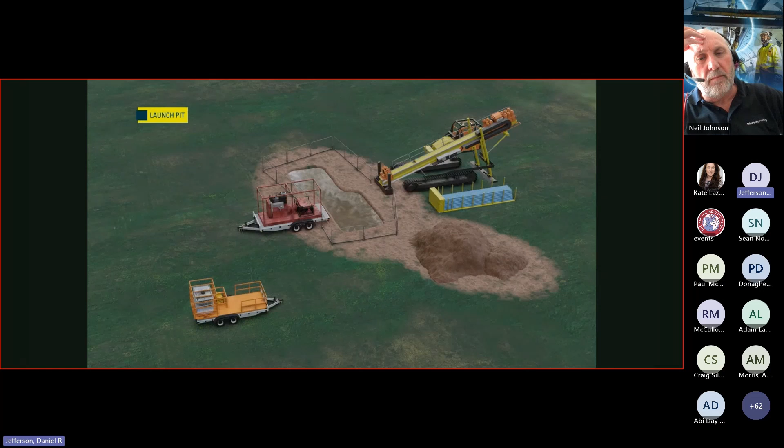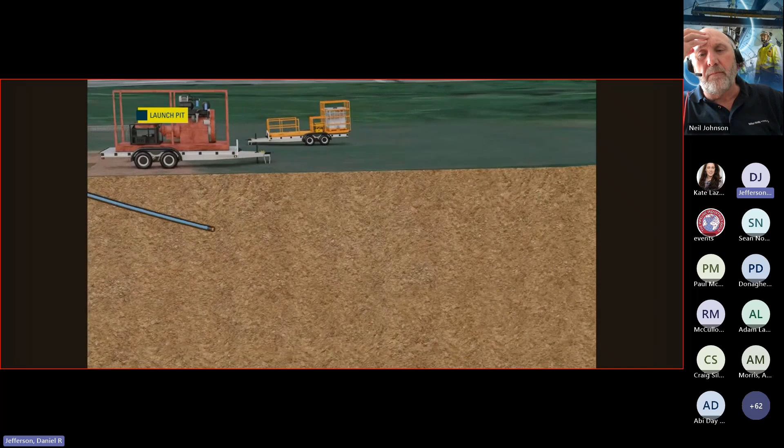Today's activity was to install 100 metres of 180mm SDR11 ducting to allow the diversion of a high voltage cable. The tunnel to accept the duct had been completed the previous day. During the last stages of dispensing the pipe, it sprang out of the bottom rear quadrant and struck the driller, resulting in blunt force injury.

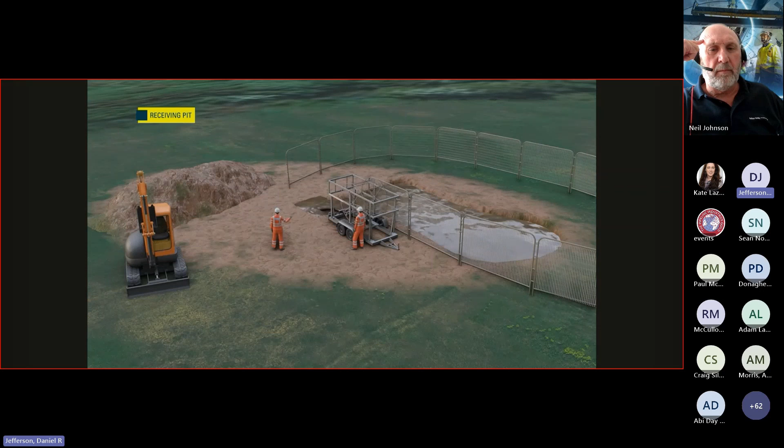This animation is issued along with a safety update on safe operations and actions to be taken when working with coil trailers. There is also important safety information regarding the safe systems of work which need to be observed when using this type of equipment.

Thank you, Dan. If we can get that off the screen - not sure whether there's any more slides in there. Okay, right. So I think that should hopefully give quite a lot of context to what actually happened.

And as I said at the head of the call, I'd worked in and around the gas industry for close on 40 years of my career, and I'd never seen that sort of situation happen on the hundreds of sites I've been on where coil trailers were in use. And clearly, when such a tragic accident happens, the thing that any investigation and any organisation tries to do afterwards is to prevent it happening again.

Now, this job was being done by Harper Services on behalf of Morrison Water Services, who Balfour Beatty Vinci, who I was part of, had subcontracted to do this work. But we felt that what we needed to do as Balfour Beatty and HS2 was to use our convening power to work directly with coil trailer manufacturers and the wider industry to try to prevent such a tragic accident happening again.

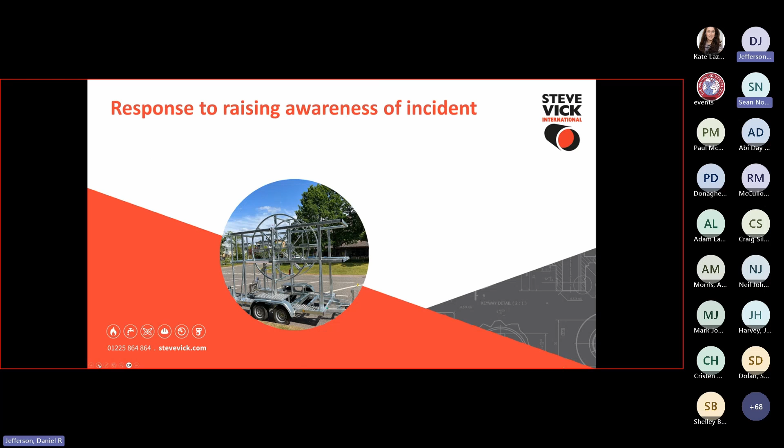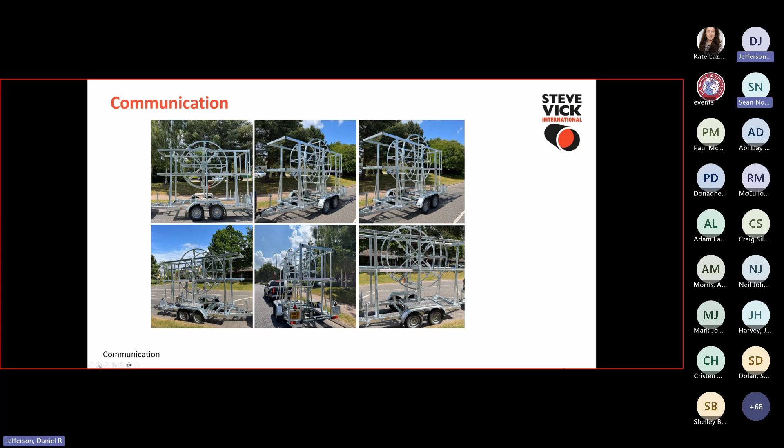So in light of the incident, what we've been doing ourselves as an organisation is working our way through our database of 180 trailer customers from the last 20 or so years, reminding them of the existing safety features of the trailers and the importance of following the operational instructions in the manual, but also making them aware of additional equipment being developed and trialled that will become available in the coming months. We're also creating a bulletin we intend to communicate in the next couple of weeks with the information you'll be seeing today.

Although there are established safety features and protocols to manage the risk, what we should not do as a supplier or as a sector is say there's no need for change. We should always look for improvements, just as Neil said earlier on. So working with industry folk like yourselves and other trailer manufacturers, we've agreed to develop additional safety elements for the trailer and its guidance for use.

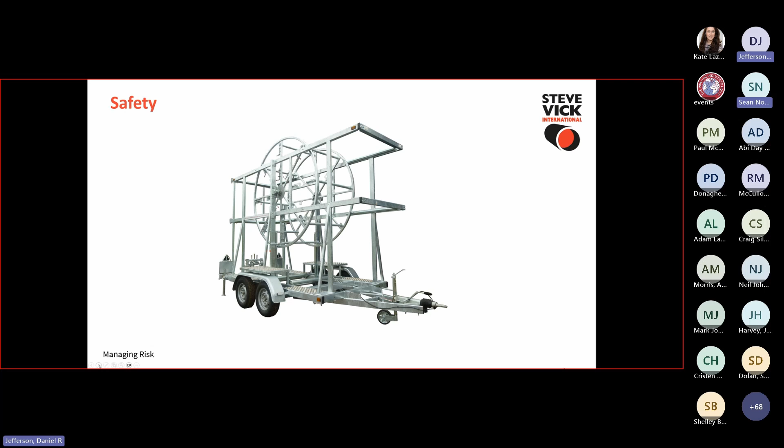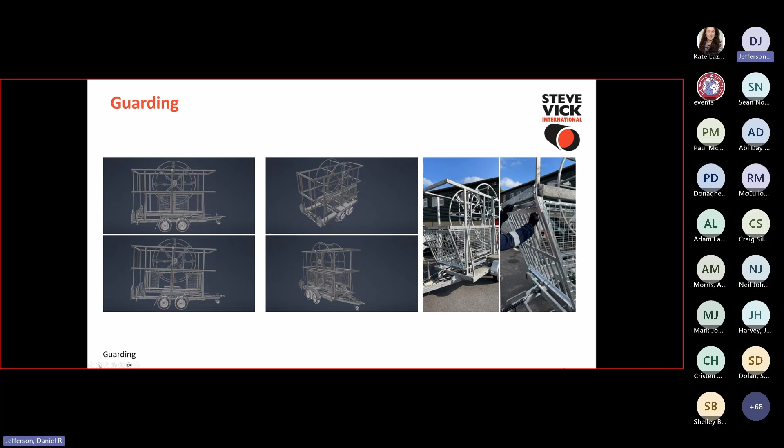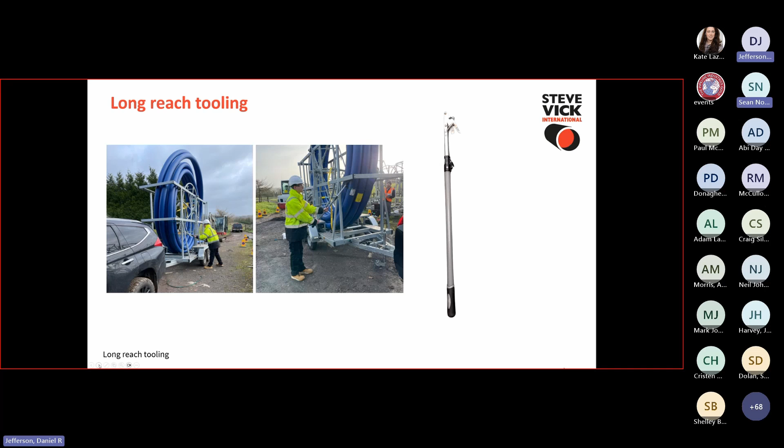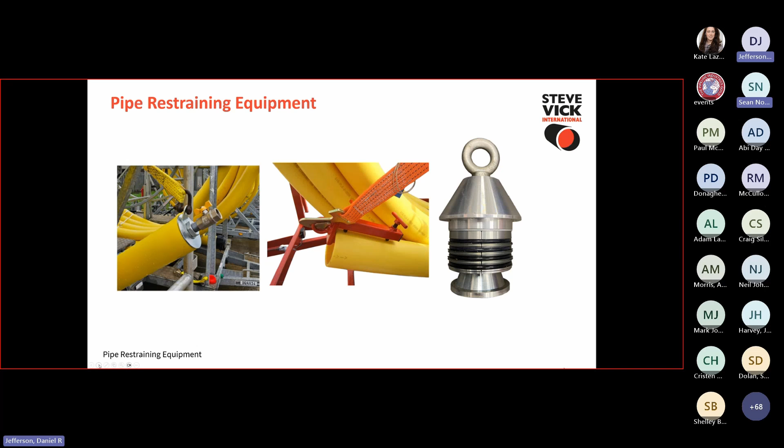What should be considered is that if you are winching or directional drilling, use a pipe test end on the left or a towing head on the right, due to the additional pulling forces created by this type of machinery. Also acknowledge that due to the pulling forces, additional anchoring of the trailer might be necessary. Next slide, please.

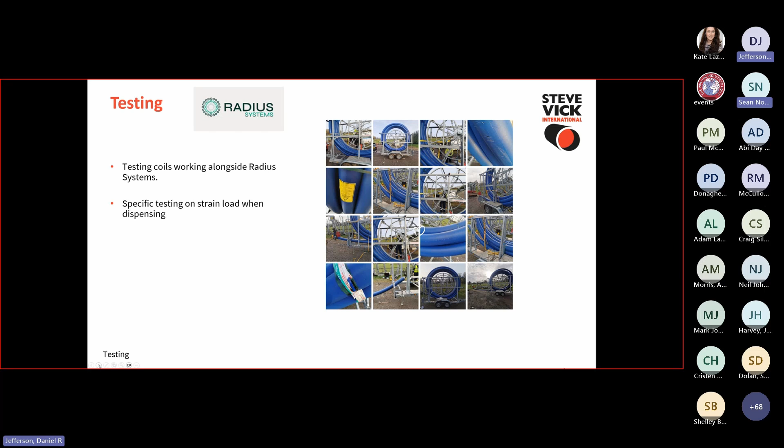We managed to carry out this testing from a safe distance using Bluetooth load cells, seeing the data in real time on our tablets as the dispensing was taking place. This data has really helped us design the safety elements mentioned earlier and make sure they're fit for purpose. Next slide, please.

In addition to existing communication, we've been updating our manuals, which are on our website. We've included extra images for clarity and reinforced the guidance for safe use. We've also made sure that at point of delivery, one of our team will run through a 7-point document reiterating the safety information and the requirement for operatives to be trained and competent. We offer briefings on awareness, but we'd recommend you use an accredited EUSR or equivalent training body.